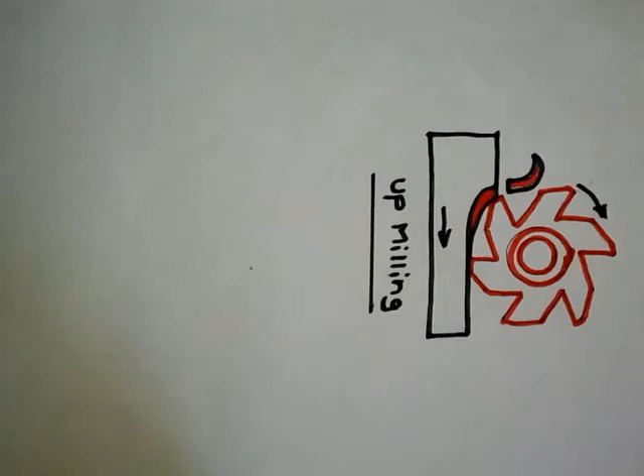Good morning, friends. Today I am going to explain the upmilling process. Upmilling is one of the milling processes used to remove material from the workpiece in the form of chips by the rotating multi-point cutter.

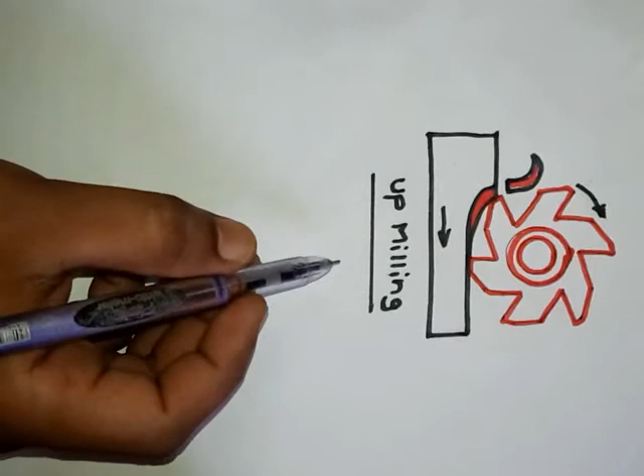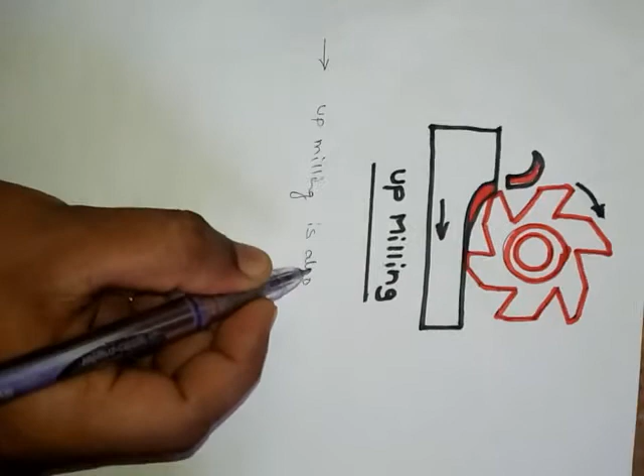So here upmilling, I will explain the steps one by one. Upmilling is also called as conventional milling.

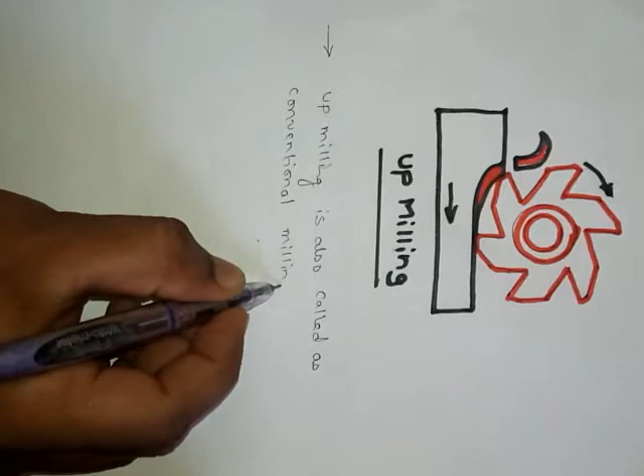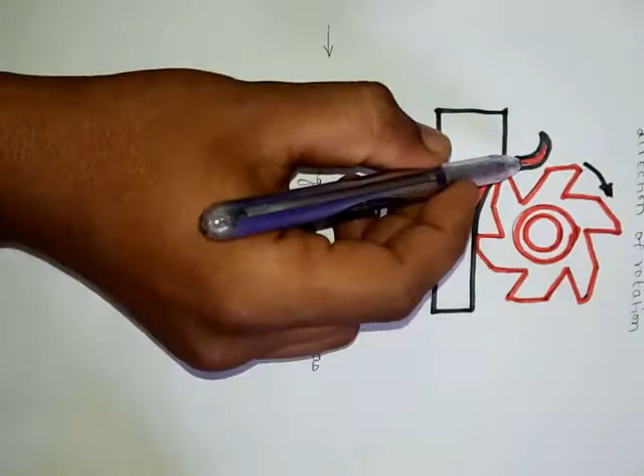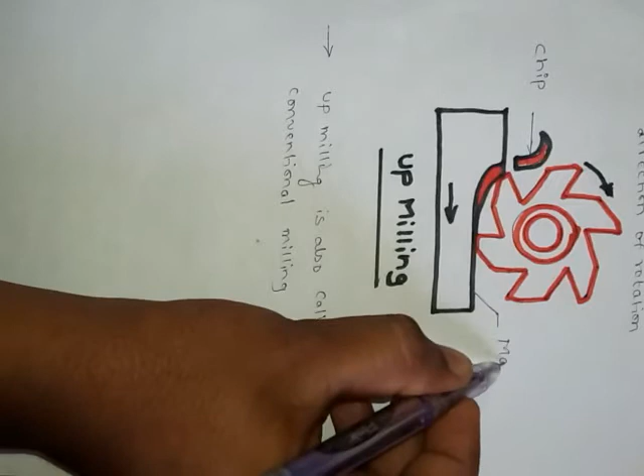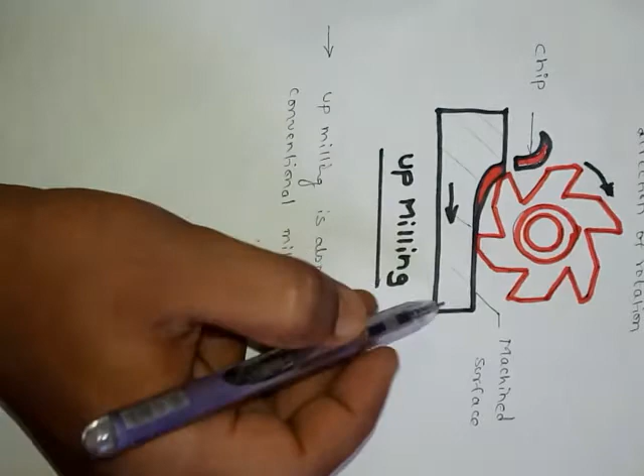The direction of this cutter is clockwise, so this is the direction of rotation. The cutter rotates stationary in clockwise direction, and this is the chip formed after removing the material. This area, which is already machined, is the machined surface, and the whole object is our workpiece.

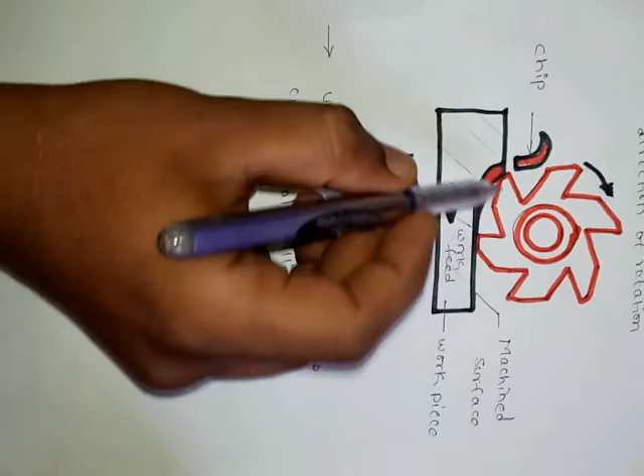The arrow mark shows the feed of this workpiece, the work feed, which is the movement of the workpiece with respect to the cutting zone. The cutting zone starts here and this is the ending of the cutting or shearing. This red zone is the shear zone where the material starts to cut.

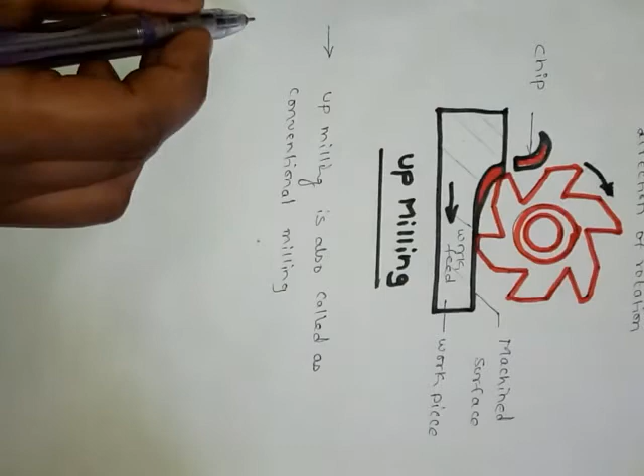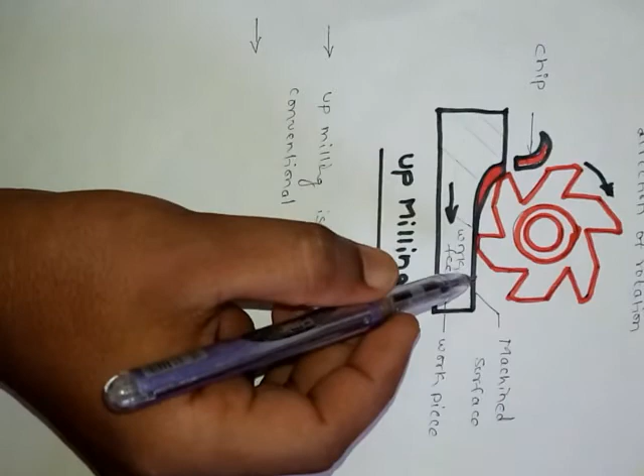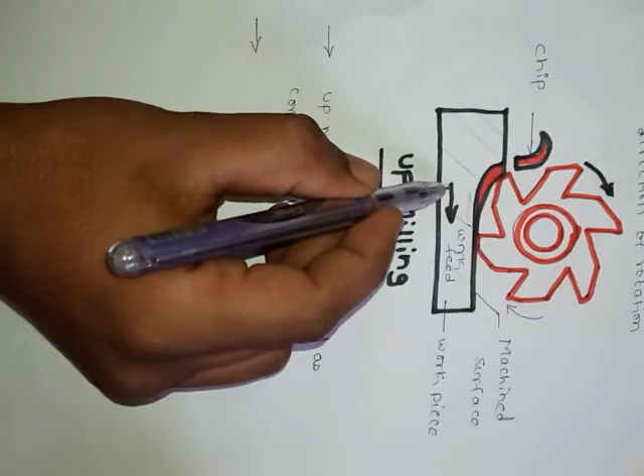Come to the second point. Here the cutter rotates, and the rotation of this cutter is against the direction of travel of the work. The cutter rotates in this direction, clockwise, so the feed is in the opposite direction.

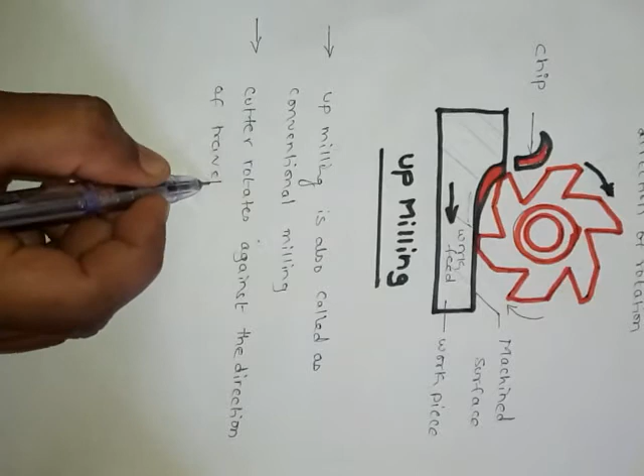So the cutter rotates against the direction of travel of the workpiece during the cutting process. Now come to the third point.

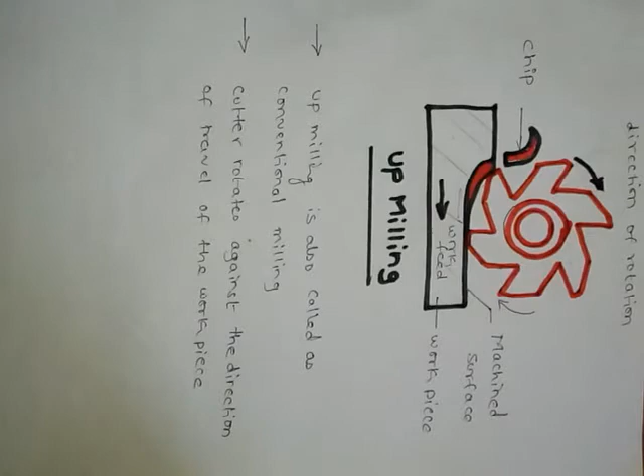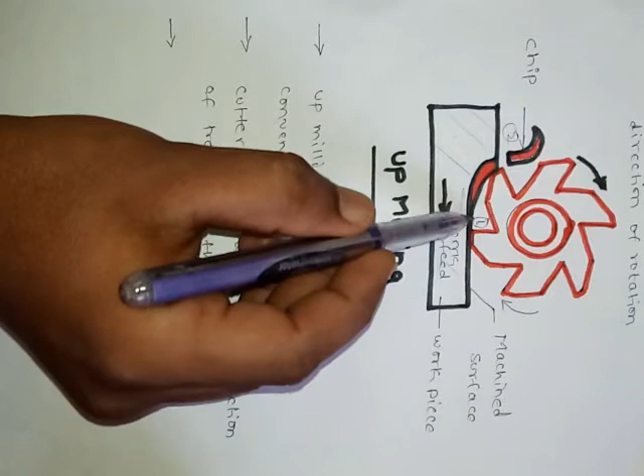The third point is where the cutting force is in this working process. The cutting force at the beginning is minimum, and there is no metal removal rate there. You see this zone, there is no material since this surface is already machined.

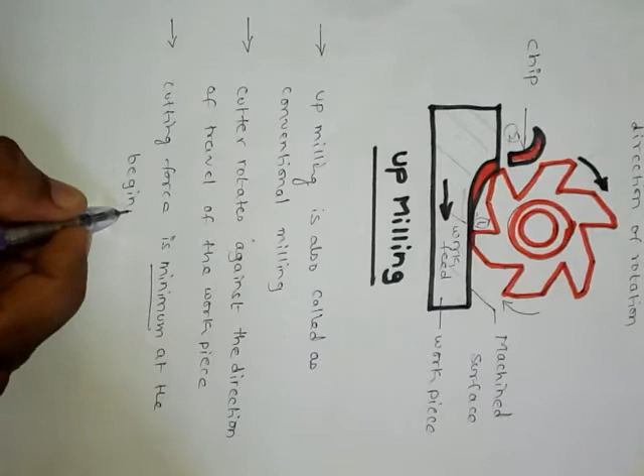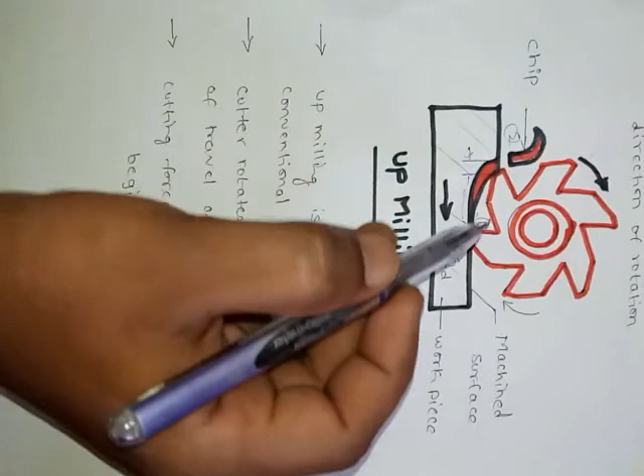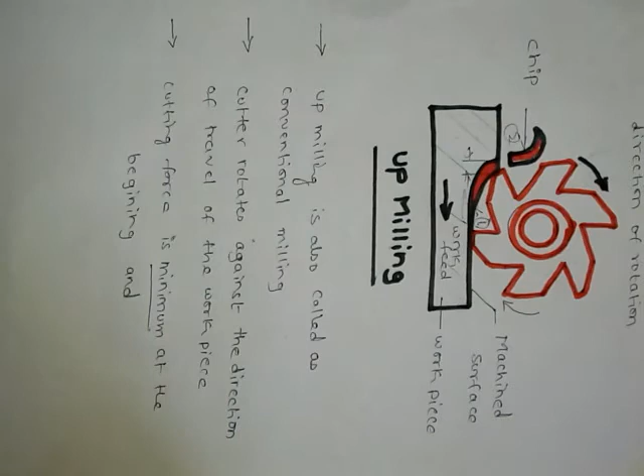So at the beginning, cutting force is minimum, at the beginning of the cutting process. Here you see the thickness of the material is maximum, so the force required to remove this amount of material is more. Hence the thickness of chip or material is less at the beginning, requiring minimum force, and maximum force at the end.

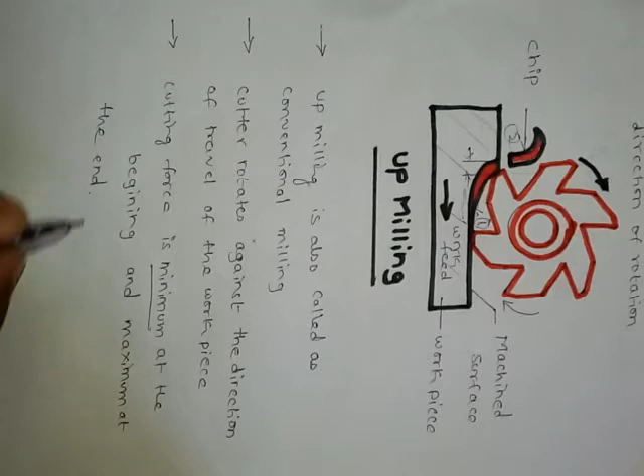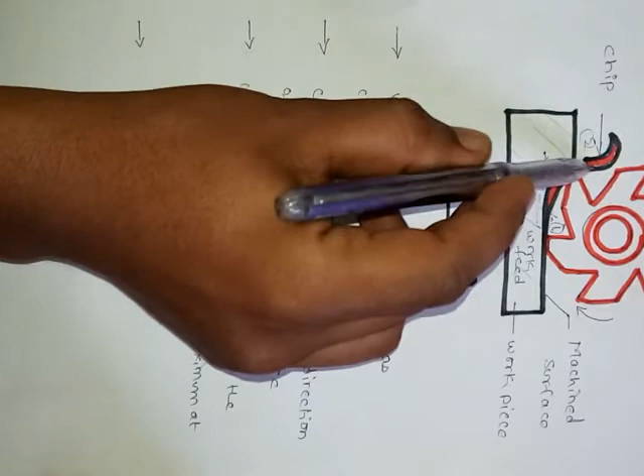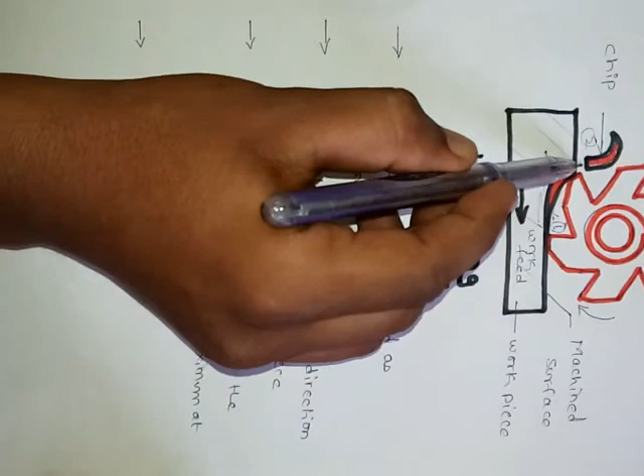Next point: chip thickness starts at 0 and increases towards the end of the cut. This is the chip thickness - you see this zone, the thickness of chip is 0, and in this area the thickness of chip is maximum or increases.

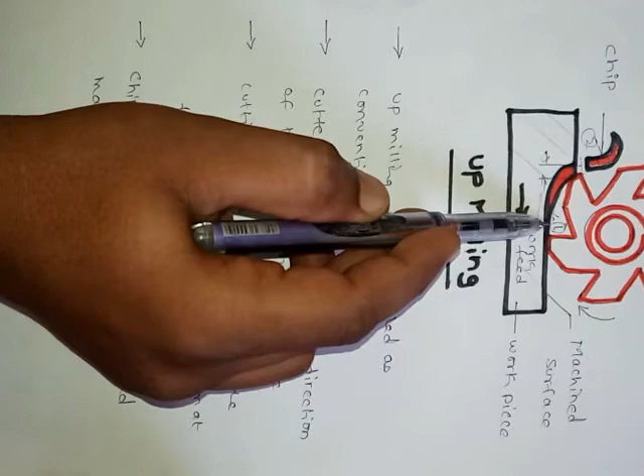So chip thickness starts at 0 and is maximum at the end. At the starting or beginning point, the thickness of chip is very less, considered as 0, and at the end it increases. As the cutter travels, you see the chip thickness increases, and at the end it is maximum compared to the beginning.

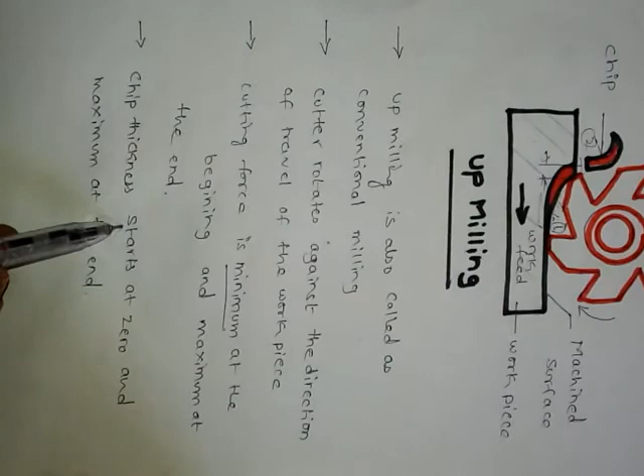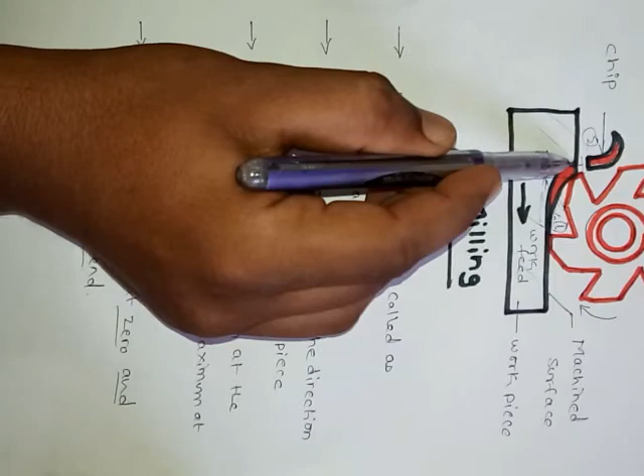So chip thickness starts at 0, meaning the portion where there is no chip thickness, and is maximum at the end. So from beginning to end, compared to the end portion, the chip thickness increases or is maximum.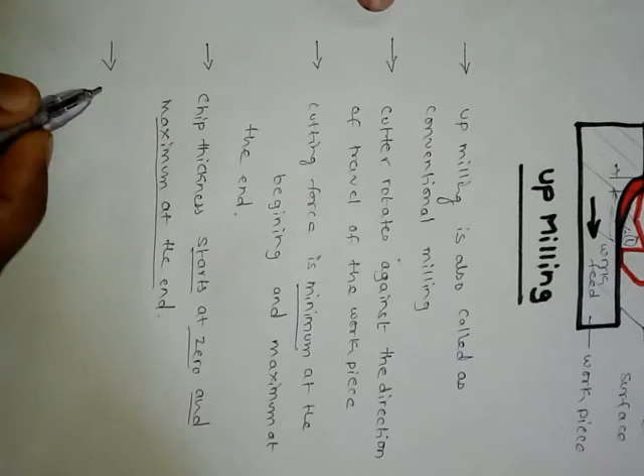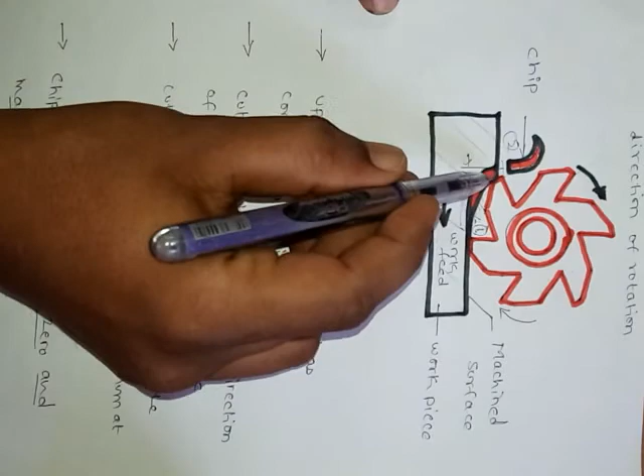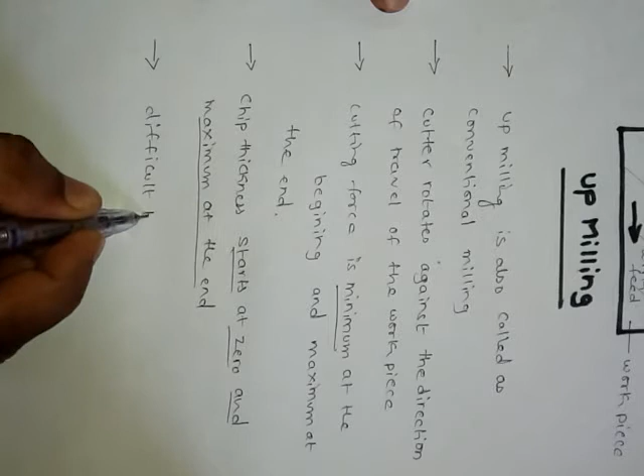Next point: in this up milling process, cooling of this zone is very difficult because of the nature of the cut, so it is very difficult to pour the coolant.

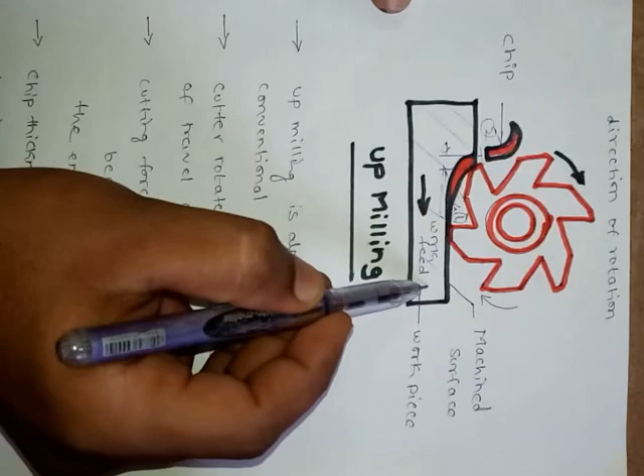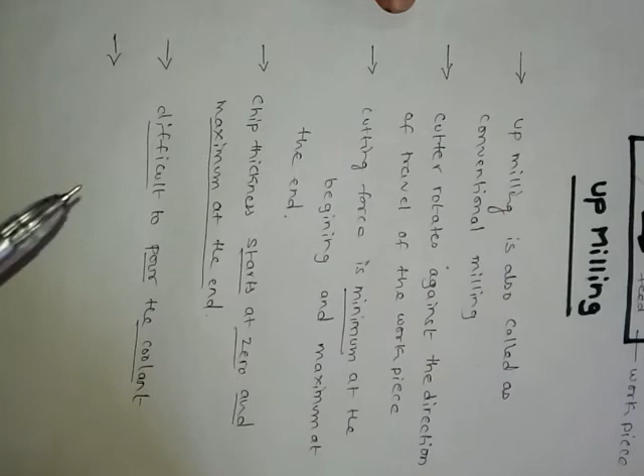Due to the difficulty in pouring coolant, the surface finish after completion of the cutting process is very poor because of high heat generation. Since there is no coolant, more heat is generated, hence the surface of that cutting zone is subjected to poor surface finish.

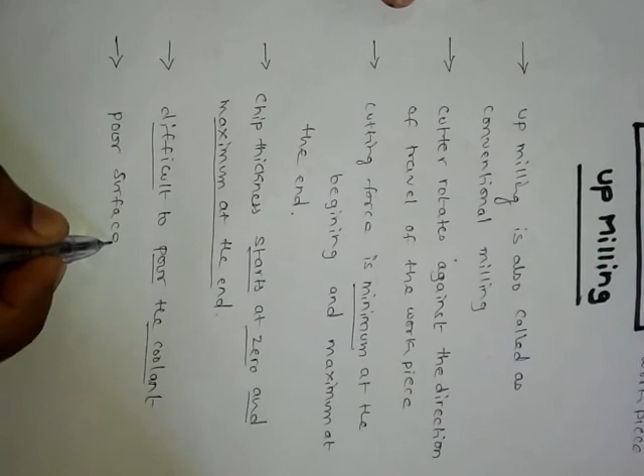So hence the last point is poor surface finish. This is regarding the up milling process. Thank you.